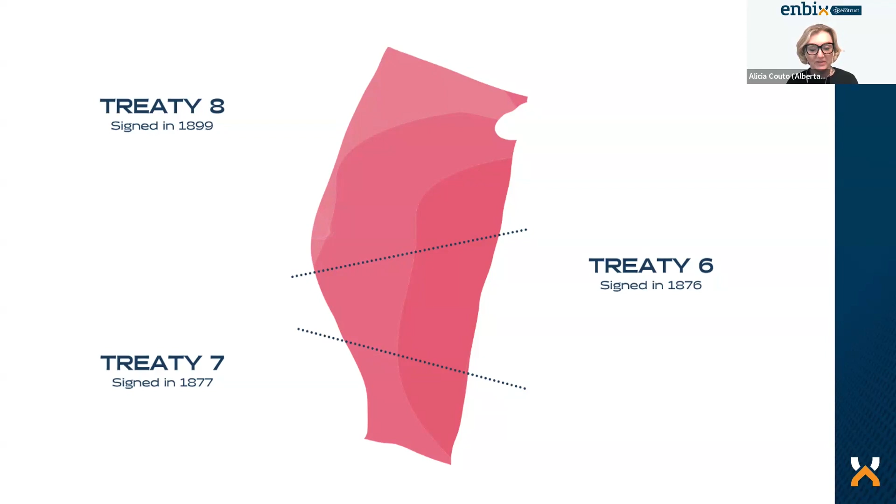For those who may not know us, Alberta Eco Trust Foundation is a charity that leads and supports environmental and climate action projects in Alberta. We were founded over 30 years ago by environmental not-for-profits and the oil and gas industry. We've partnered with often unlikely groups to help mobilize environmental action, and our programs include grants. As an LC3 founding member, we also have an endowment that allows impact investing. We help run programs where there is a gap in the industry, such as our HUP program, ENBIX, and Retrofit Accelerator, and we're well known for our strategic engagement.

Alberta Eco Trust has two programs that support the building industry: ENBIX, which stands for Emissions Neutral Buildings Information Exchange, and Alberta Eco Trust Retrofit Accelerator. ENBIX is a collaborative initiative of Alberta Eco Trust that brings the building industry together to share knowledge, build capacity, and support building and renovation practices across Alberta. The goal of ENBIX is to reduce emissions from new and existing buildings across Alberta. We do this by hosting events, sharing resources, and developing and strengthening the skills of people and organizations through training, peer-to-peer learning, and communities of practice.

Our Retrofit Accelerator is a free coaching program designed to guide building owners and managers through sustainable building upgrades known as deep retrofits. These take a whole building approach to standard upgrades to reduce emissions, energy consumption, and operating costs.

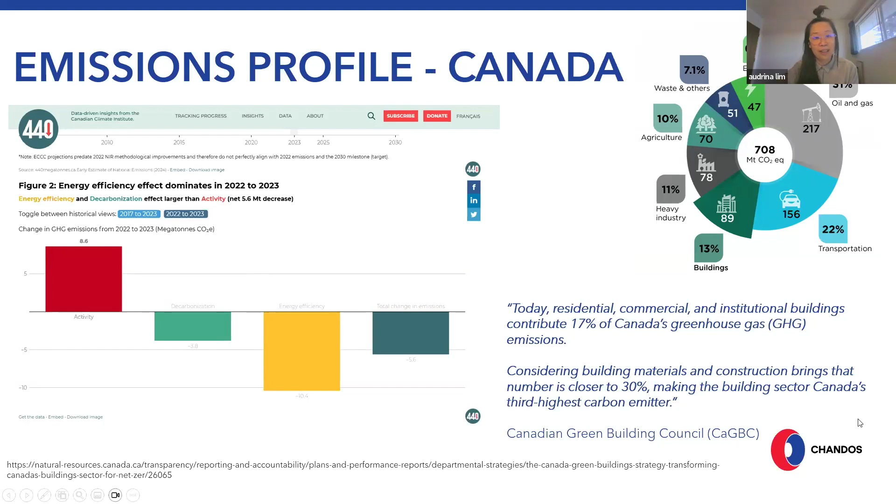And in Canada, this is actually written into our statutory requirements. So until that changes, we are all in. And even if it does change, I'm sure we are all in.

Now, these are in low-lying areas and areas that have been impacted by floods, sea level rising, fires. We've seen a lot of that in the news, and especially in Australia, where I was raised and started my initial career. They've had some significant fires as well. And in Canada, we see significant steps towards trying to understand what that looks like. We've had atmospheric rivers. They've claimed lives. We've had fires which have claimed lives, livelihoods, and houses.

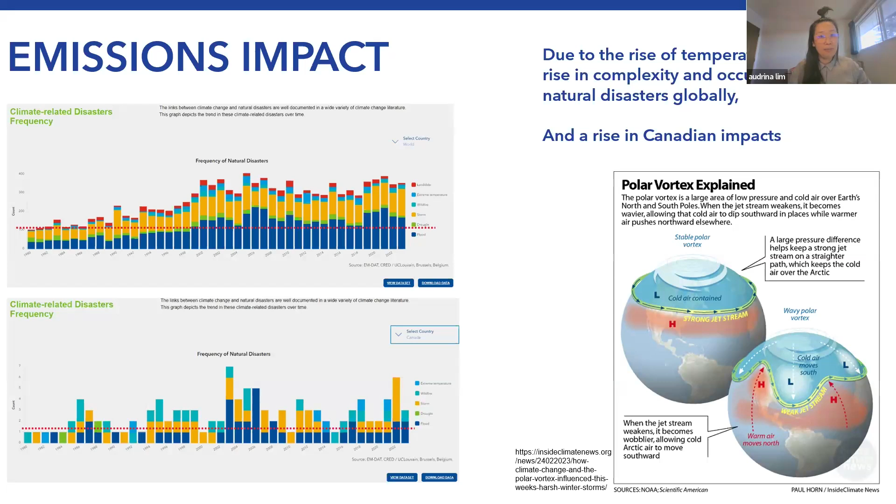A little bit about our organization and our decarbonization journey. I just wanted to show you a couple of awesome studies here. You can take a screenshot and dive into it later if you want to. But I just wanted to go through why we're doing this. We are B Corp certified, and it's part of our mandate to actually reduce our emissions. We get audited on that too.

And then with our GHG inventory, what it represents, how we measure, and what that dictates in terms of our actions on site. I want to quickly touch on our market for change and basically wrap that up in our journey to decarbonization. So with our B Corp status, we are actually doing pretty amazing. We recently scored 158 with the B Corp, and on average, companies who achieve this assessment currently sit at 50.

So for us, it measures our ethics, governance, workers, community, environment, and our customers. It gives us a general health profile of our organization, and we continue to strive for that. And one thing I'm really proud of is that it elevates our standards. It ensures that we pay above living wage, and ensures we look after every action on site that has impact, and we are accountable for it too. So to me, it's like our North Star, our guiding light, and we continue to push forward because of it.

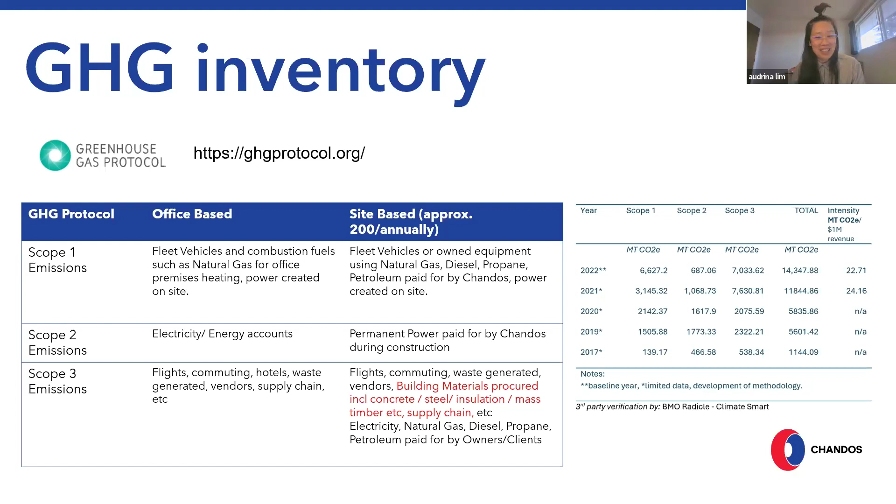And it's not easy, because Manny, who's on our team, helps me do these inventories. And between us, we go through about 500 summarized lines of data, 30,000 lines of data processing, and that's just on scope 1 and 2. And we also look at about 200 to 300 sites that have been registered on our revenue reports. So this is not an easy thing, and this is something that we have to do annually.

So with the complexity of that, I wanted to demonstrate that this isn't an easy task, but it's doable, because there's 2 people on our team who do this, and we record everything that comes across our sites that's held under our account. And this is how we measure and how we learn.

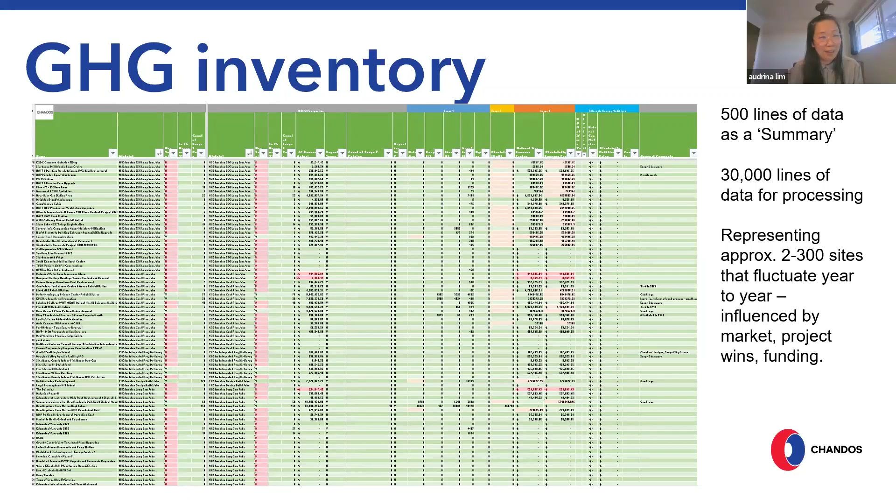We also dive into our data. We do analytics where we look at where is the highest use and where is the highest energy density, and what does that look like in terms of our emissions profile. So across our 9 districts, we take deeper dives into it, and we start to strategize how we reduce from that point on, because we want to have the biggest impact, we want to understand that it can be replicable, and we want to understand regionality.

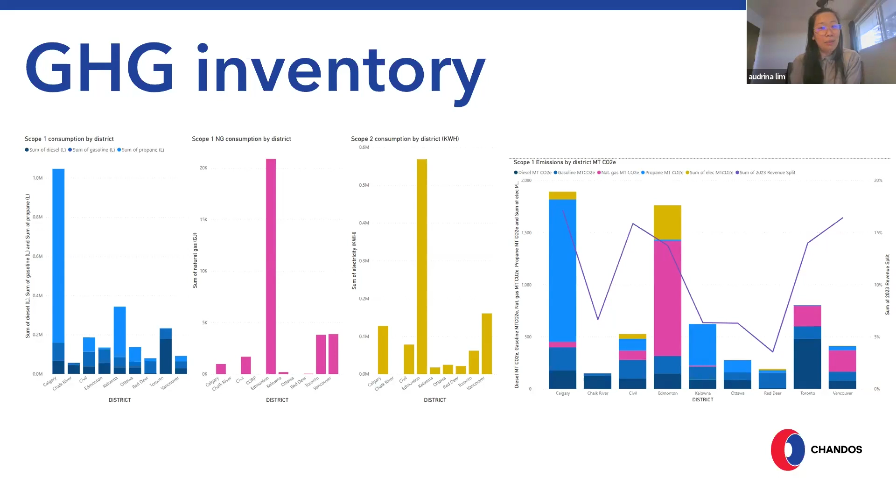In terms of action in our industry, there is so much happening. We know that there's new structures of reporting requirements coming down from investments, so it prevents greenwashing. We know that there's an update in building codes, including our National Energy Code, that helps us move the operational carbon of buildings forward. Right now, it won't be until 2030 where they start to introduce embodied carbon in materials, and that's really going to start affecting our procurement. So for all the manufacturers out there, bear this in mind, that it is coming.

Vancouver has already launched that into their regulations. Toronto, all their owned buildings also look for embodied carbon. We have financial incentives currently being provided through government and other funding sources. And for us as a general contractor, we look at our procurement, our strategy, and our construction collaboration to be able to find ways to reduce. And that's what we are going to dive into.

Now, considering we just scrapped our consumer carbon tax, we've got to understand what that does for signaling to our market. And we need everybody to still continue to advocate for this continuance of impact, because we are making a difference. I just wanted to highlight that because if we don't take further action, it's going to be a very different looking scale.

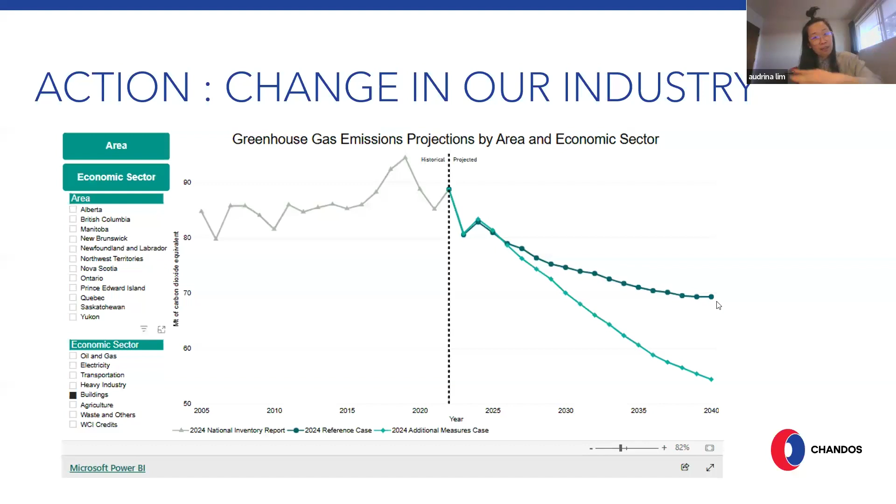Okay, moving on. So this is our team. They did an amazing job on this project, and I'll go through a little bit more.

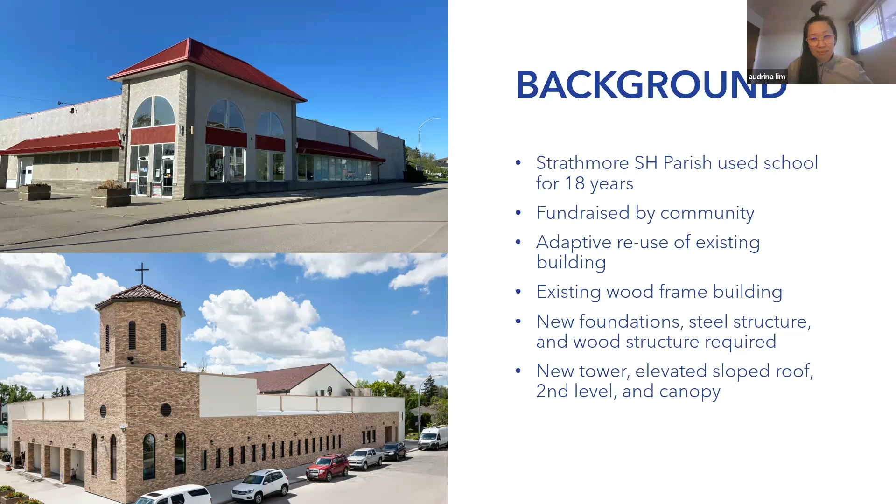Sorry, I'll just introduce myself from the previous slide. I'm Johnny, the assistant super. And yeah, as Audrina was saying, we had this existing drab building and it was very complex in the way it was framed inside. So we had the challenge of incorporating the new design into this existing, and the design was left intentionally vague so that we had an opportunity to maximize how much we reused and how much we had to take out. So that was the initial complexity, I would say, Audrina. It's just the intricacies of how it was built originally and how we were going to move that into the new design. But I can chat more on that later as we go.

Awesome. So the next one is to talk about the do less or use less. When we talk about trying to avoid carbon and the biggest impacts, I got this little graphic here from Lloyd Alter, who has this really great blog called Carbon Upfront. And there's a link there if anyone's interested. But it's about using less material. Now, it's not always okay to just do nothing, right? We have a growing population. We have a growing community. They need more infrastructure. And we're seeing that all over the globe. So build nothing is not necessarily the answer, but adaptive reuse can absolutely be a great solution.

Then we go to something like build less. How do we still have a viable construction economy if we're building less? And I think it's about building smarter, which is the next step. Then we want to look at building efficiently and minimizing the waste. Now, all of this goes into use less stuff. Then we go into the low carbon materials. Then at last, if we cannot avoid these, then we offset to get to net zero carbon. Now, this is very consistent. I'm sure you've seen a lot of these pyramids go around.

But what I wanted to highlight was from this project, we couldn't not do it. We couldn't do a reduced scope of this. So what we had to do was relook at value engineering and look at a different way of delivering this so that we still maintain time, quality, and cost. So there was a very tight schedule on this project that still had to be met. And I believe that the discussion at procurement of Chandos onto this project was that we could try and innovate the schedule. And that was a huge driver.

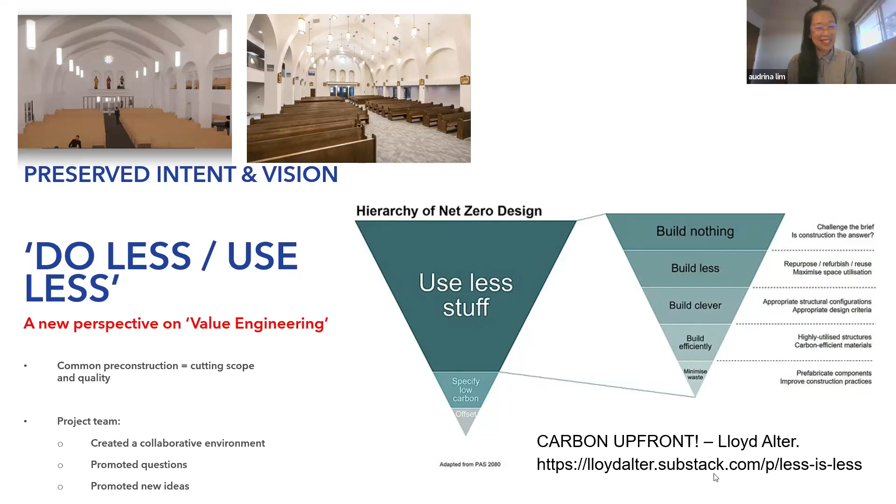So really, I just wanted to highlight the focus of the value engineering was in the foundations. As Jonathan mentioned earlier, we had to preserve the existing frame. That kind of renovation work is always going to be tricky, especially existing buildings. You have to make sure that everything's being accounted for before you start digging. They targeted the foundations because there was an opportunity to reduce the work. From having an open pit for a deep foundation, they moved towards a screw pile solution and a shallower foundation. Everything had an existing slab.

They wanted to revise this, so the engineers participated with the sub-trades and Chandos and the owner, started looking at all the potential impacts, and the outcomes became minimizing the invasive demolition, reduced cost of new foundation, including the materials and the labor, reducing the waste. If you touch less, you don't have as much to haul off site, especially with a regional location, and an increased site efficiency. I'm going to dive into that a little bit more.

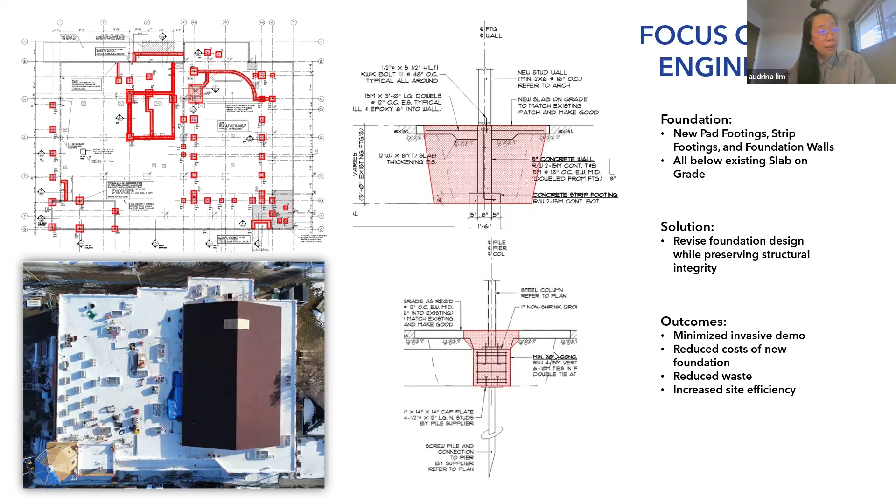So the original areas as designed, you could see what that turned the site into. With a reduced schedule, that was going to be tough because safety is a concern and you have to navigate these open cut pits. Obviously, it took a lot of real estate when you had to stockpile your soils. Any thoughts, guys? Did you want to jump into this and maybe point out some of the challenges?

Are you good? Oh, yeah. Go ahead. Johnny, I'll let you talk on that. Is he lagging? He's probably lagging. Yeah, it was just the real estate, like you said. Oh, there he is. So when I joined the project, I came in. Can you hear me now? Yeah, when I came, it pretty much looked like this. Are you getting some audio difficulties? Oh no. Okay, that's all right.

John, are you back? No. Okay. Can you hear me now? No, I think it's quite laggy. I'm so sorry. Let me try sign out and sign back in. Okay, we'll press on in the interest of time. We can come back to this.

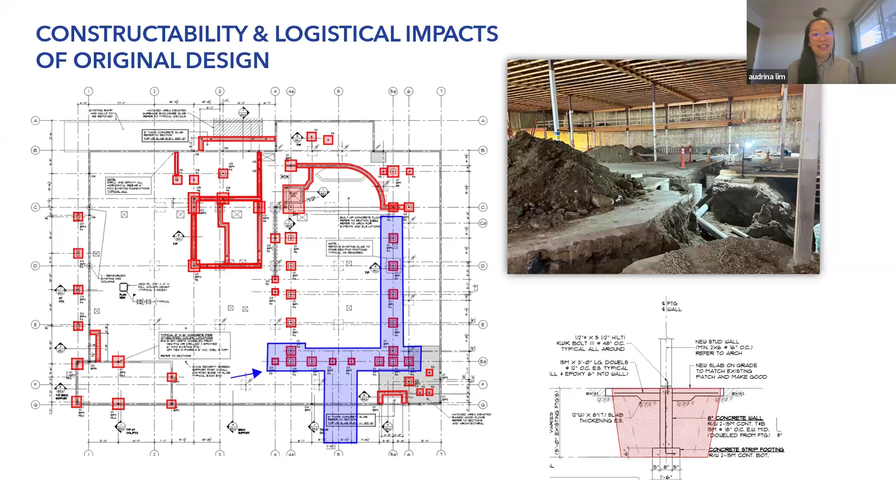So you can see there were going to be some issues, and it wasn't going to be viable to meet a very tight schedule. So the alternative was to look at what was actually going to be planned. If we were to do business as usual, this much slab would have been required to achieve this new addition on the southwest corner. And the original concrete footings would have had to be dug out and redone. So you can see what was going to be required.

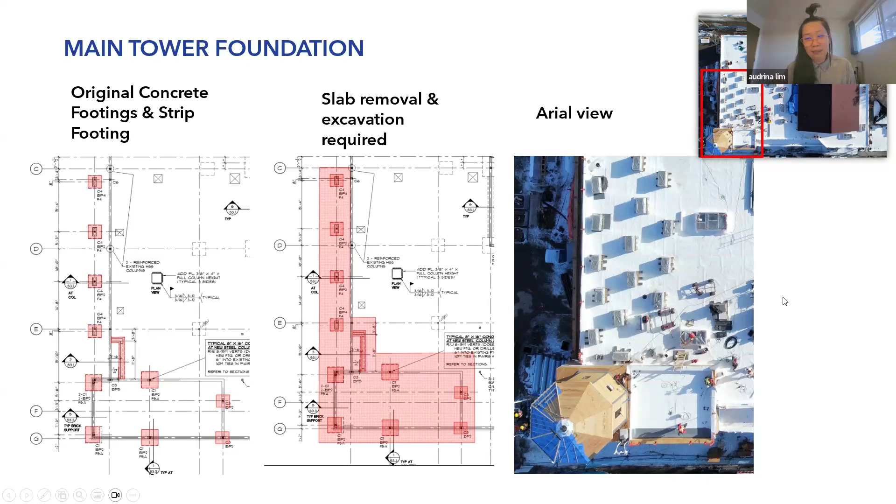The results: for the main tower and canopy foundation, we reduced the cutting of that whole existing slab, reduced the concrete removal, reduced the excavation, reduced site restrictions. They would have had to shut down a portion to create a safe environment. They'd have to do slope backs. You would have had a lot of additional storage of the excavated material, as you saw in the earlier image. What they ended up doing was going from all of this work to just touching these points with the new design with the screw piles. So you can see the significant scale of reduction of work.

And there are additional benefits to that as well: less disruptive, less noise to the rural environment. Every little bit of noise you can hear from miles away because it's a prairie. And there were also a lot more emissions reduced from not having an excavator digging around there as well.

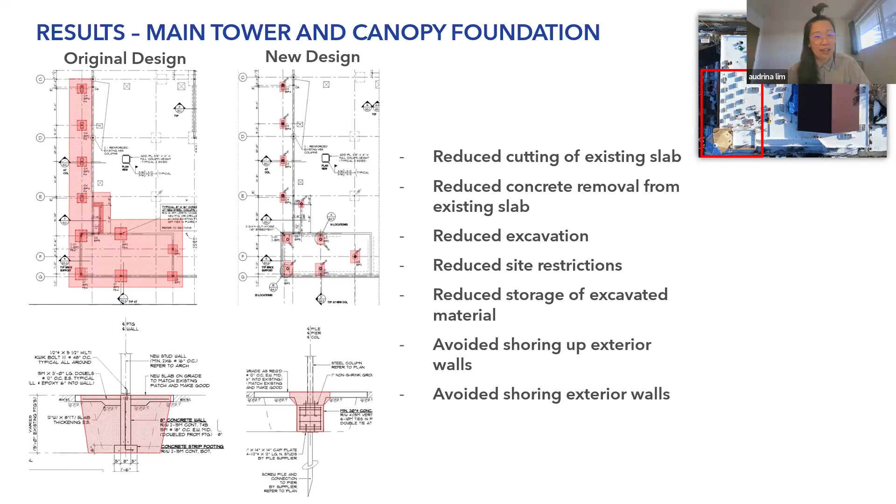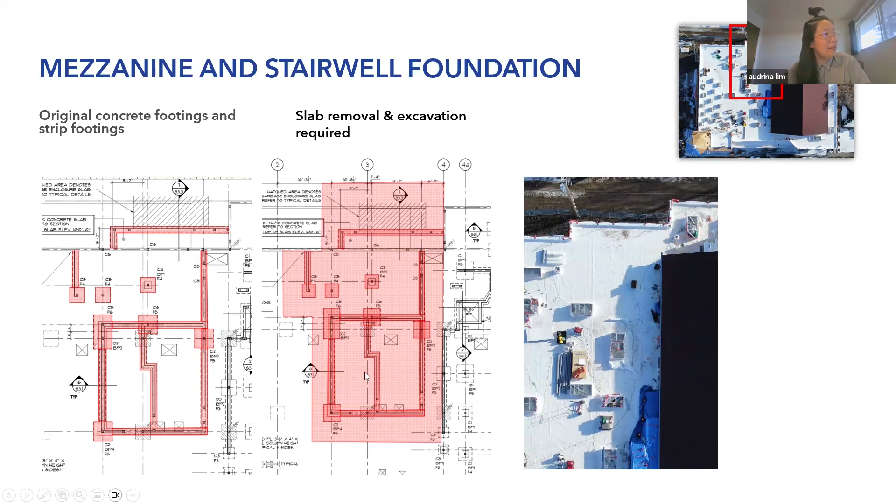So in the mezzanine and stairwell environment, which you can see in the top right, on the north side, instead of having to remove this amount of slab and do the deep foundations, as you saw earlier, the result was very, very minor. So they ended up reducing the cutting of that entire slab, reducing the deep excavation, reducing the site restrictions again, because that one backed onto a laneway and had a power pole there as well that we would have had to deal with, which was not cheap. So that was all avoided.

And it's not always easy to measure what you didn't do. So we'll get into that later. But we avoided having to shore up the power pole, shoring up the existing foundation wall, and excavating that whole back alley. So that's a significant cost that was almost unintended, and we managed to avoid that by doing this alternative solution.

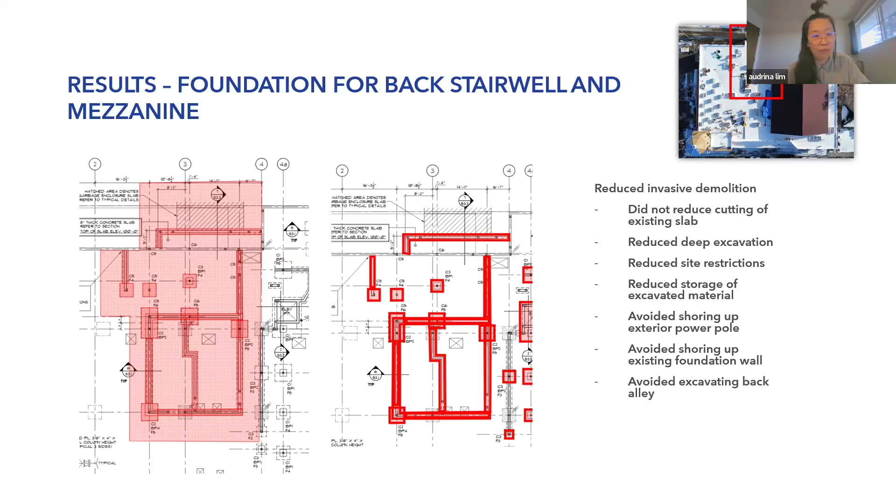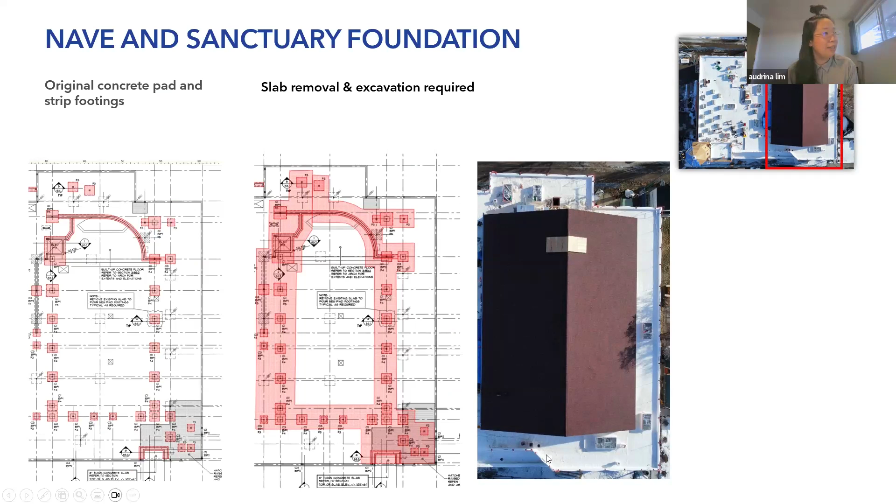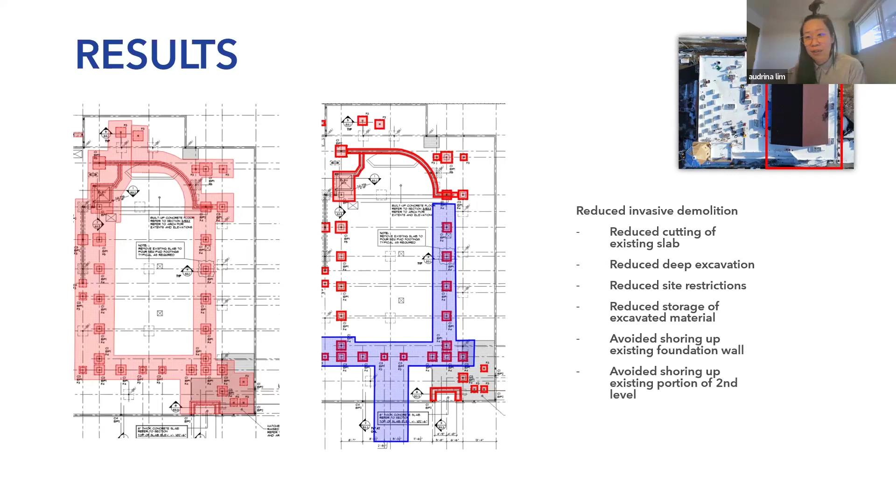In the nave and sanctuary, there was going to be a pop-up roof, as you can see here. This is extensive. So you can see how much was saved in this environment by going to the alternative solution. Very similar results, except the blue area was where that original image you saw had to be excavated. So we got some really great accurate results out of this one. And in addition to that, you can see the physical difference on the site, going from what you saw on the top to having just minor holes covered up, preserving that existing slab and making a much safer environment.

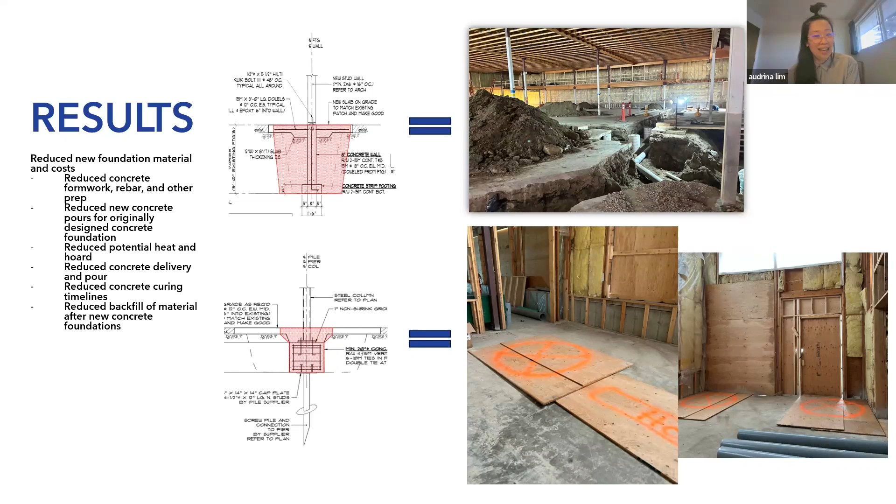This allowed for a lot of reduced material, including concrete, rebar, all the associated. The potential heating and hoarding, because this was getting close to the fall. And they actually were able to fast track this because of the reduced amount of scope. They reduced the backfill material as well that would have been required, and a lot of the concrete curing times, which allowed the schedule to improve.

So because of the schedule getting reduced, and I'll ask Jonathan and Tavia a few questions around this as well, they managed to actually save 2 months, which allowed them to beat that deep winter freeze. It was -40 that hit a couple of weeks after, which saved quite a lot on the heating costs. And it allowed them to deliver a lot earlier. I think it saved about $250,000 overall for the project in what we had measured against. So Jonathan, did you want to quickly give some insight into how this was attained?

Yeah, I've turned my camera off. Maybe that was causing some issues. Can you hear me now? Yeah, perfect. Okay, excellent.

Yeah, so as Audrina was mentioning, the original plan for these foundations was quite vast. It actually included 9 feet foundations. So Chandos kind of challenged the design there a little bit, and we proposed a solution that we were comfortable with, that we knew would work based on industry standards and the National Building Code. And then that really opened the conversation with the designer and started to build that collaboration and trust that went both ways. I think they understood pretty soon into the project that we were about finishing on schedule, building a quality product, and getting those parishioners into the space on budget and on schedule as we promised.

And just a quick note on that: in the initial meeting with the client, when we told them the schedule, they actually laughed at us because they thought it was not achievable. Fast forward to a year later, we were on the promised date, and we were all very proud that they mentioned in their opening service at the church that on May 31st, as promised, we moved in, and that was a great achievement all around.

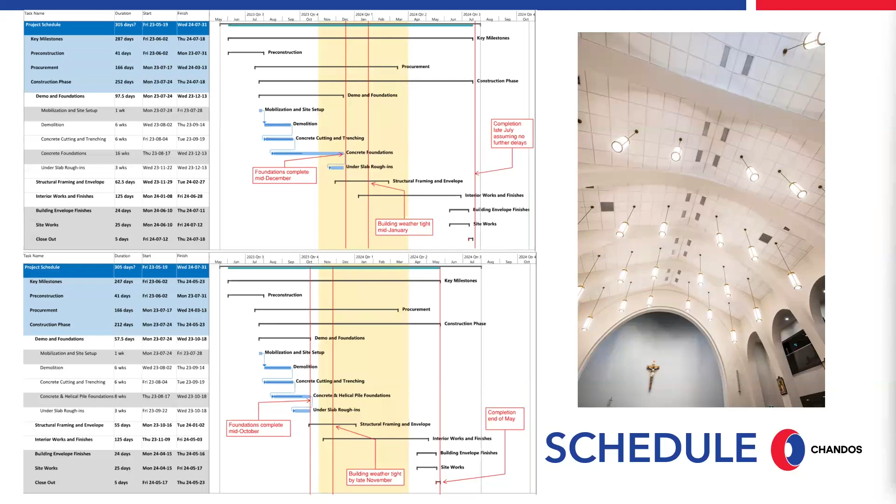So back to the schedule. With this proposed solution of doing the screw piles, like Audrina mentioned, we were able to tighten everything up and stage ourselves for the winter effort where we could be inside with minimal critical heating, so that we could keep going through the deepest, darkest winter, which is exactly what we did there. I'll let you carry on, Audrina. Sure, we can jump back into that later. Yeah, for sure.

Okay, so I'm going to blitz through a little bit because we're getting a bit short on time. But in the cost savings, we saved $250,000 in the foundation alone. And that doesn't even include all of the additional overhead savings that we didn't have to go additional to, right? So this is significant. And this also does not include our heating and hoarding savings because they were going to be contractually separate costs. So there was a lot more that was coming that we actually managed to avoid.

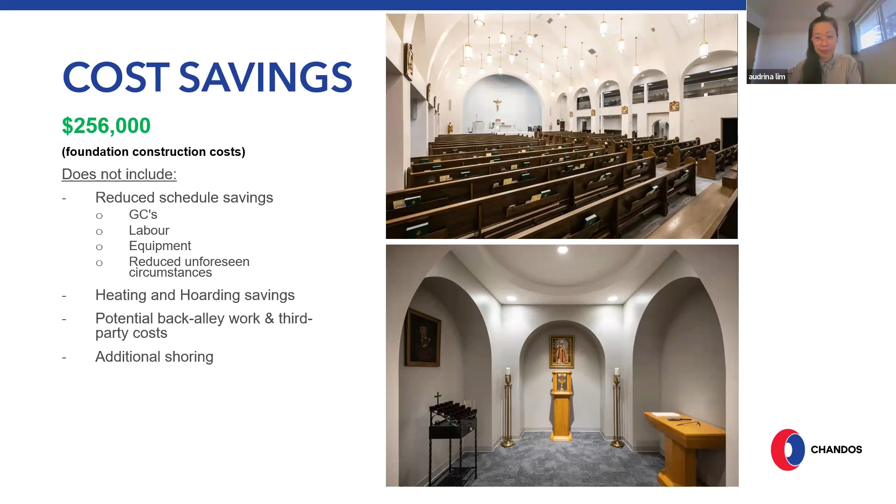But when we try and measure avoided things, we try and look at what is it that's tangible for us to measure? And I'll get into that a little bit more. There's some other wins. They were able to tie into the building utilities to reduce the overhead costs of fuels on site. There were a lot more clean sites and fewer safety issues. We had much better constructability. So because of a cleaner floor area, they were able to work overhead and enclose the roof quicker. And that was a self-performed scope.

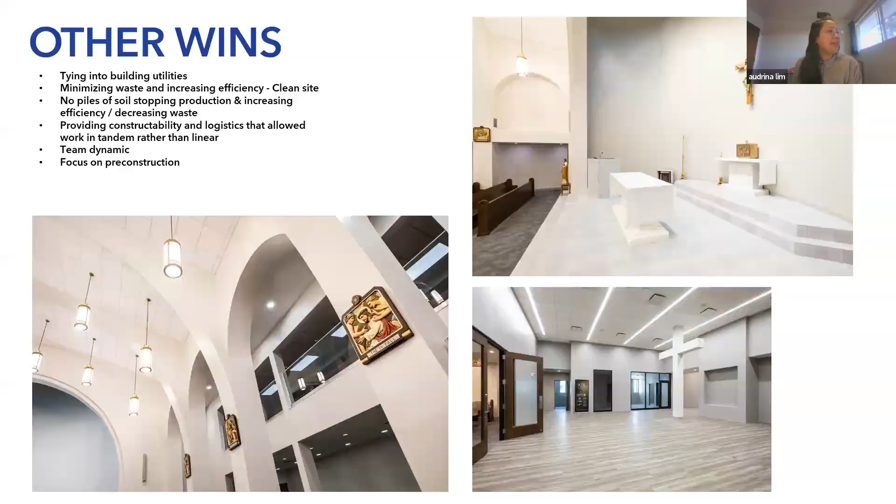And the team adapted really well to that and were able to then create a much warmer environment, also providing more efficiency for heating when it actually came down to those freeze conditions. And again, the team dynamic, the focus on the pre-construction planning, measure twice, cut once, that is the motto of this amazing team. And they've been continually delivering that on other projects as well. Some more images from the finished product. Very good. Looks beautiful.

Okay, I'm going to dive into measuring avoided emissions. So how do you measure something that didn't happen? You've got to create the opportunity to ask the questions and collaborate. Create a business as usual baseline. So what that means is, what would it be if I was just to do this the usual way? If I just did standard practice, cost it out, get your schedule, and look at the activities that you're going to have to do, how much material you're going to require. Then you can start to challenge yourself to think differently.

So then another way to consider measurement is to set out what is tangible to measure. Because we want to make sure that we're not overestimating, we're going to ensure that we have some measurability. So we want to be conservative in outlining what we can identify, and that we can support it with data. So that allows you to then set a baseline and measure different conditions to the same data set. And that way you have really consistent differentials that you can identify and dive into your analytics. Then you can evaluate. So you set a beginning and end date, be specific with the activity or the activities that you're going to study. And we're going to dive into it.

So material reductions. What we did was we did a takeoff of the materials. So I looked at the total cubic meters on the before and the after through concrete pour logs. We measured the types of materials that were actually required. And then we also remembered to add the emissions required for the steel screw piling, right? So in terms of materials itself, by not having to replace some of that existing slab, we saved 53 cubic meters. And then by diving into an environmental product declaration for industry average, we actually applied the GWP savings, which is global warming potential. So this is the amount of embodied carbon, upfront carbon, and if you do a multiplier of 53 cubes of concrete, it ended up at 19.1.

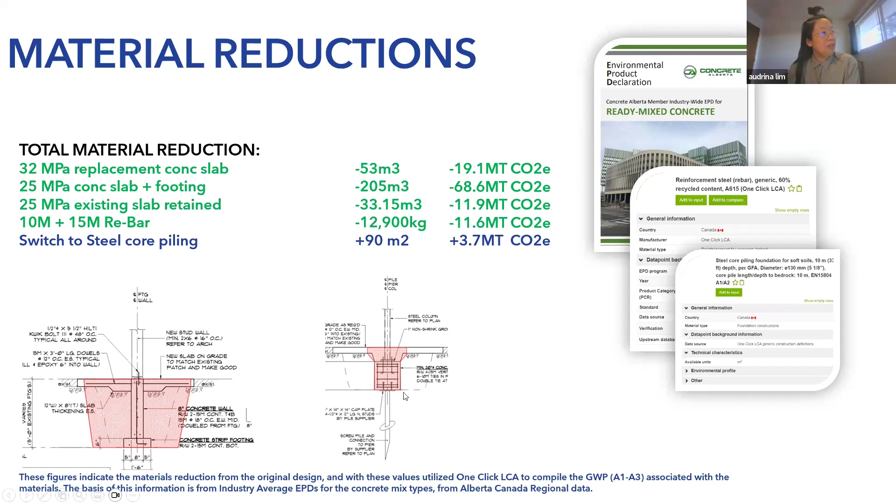And then we just went through and looked at all the items that we didn't have to purchase, and we actually saved quite a lot. So from there, in just doing that swap, we were able to save 107 metric tons of carbon emissions. And I always like to give an equivalent: it's the same as growing almost 1,800 tree seedlings for 10 years. That's how much carbon you would have had to replace it with, right?

So the tools that I utilized, I made a simple spreadsheet. You can see anyone can do this. If you have access to One Click LCA, EC3, or Tally, you can also do this too. But you can compare your baseline to your redesign or to your alternative, and you can start to quantify the units of measure, make sure they align with your EPD, outline the quantity of material, and the CO2e, which I use metric tons of CO2e. And so when you factor that in and do your multiplier from your baseline to your redesign, you get to see your avoided emissions.

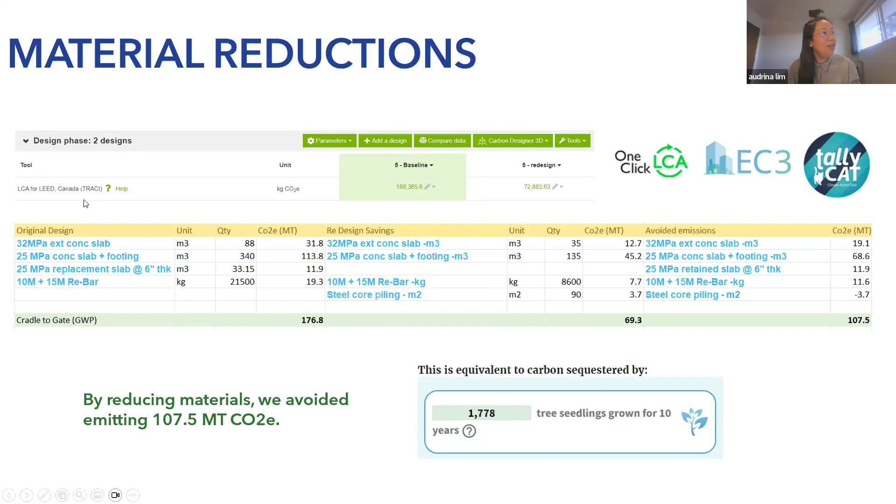So this is a really simple exercise I like to run. And you can actually see from the cradle to gate emissions, so your GWP, just up until that point, we were able to save 107 metric tons. So just in materials alone, we can have huge gains.

In our activity reductions, this is even harder to measure. Now, for me, I wanted to make sure it was tangible. So I couldn't measure everything. I just measured some. In our activity reductions, the one thing that I could tangibly measure was the hauling of the concrete waste we would have had to take to the recycling facility. Now, I did a quick map on Google Maps on where the closest concrete aggregate recycling facility was to the site, and I could get the mileage between there.

So you look at the distance your shipment will travel, the weight of your shipment, because it does have an impact on efficiency. And so for us, that would have been 10,000 kilos or 10 tons. And the emissions factor. So I went through the Green Freight Handbook, which has an emissions factor of all the trucks that they utilize to haul. And we just did a simple calculation for the distance, 22.3 miles. There would have been about 20 hauls of this based on the volume and weight of the concrete, by the heavy vehicle emissions factor, which would have been 2 kilos of CO2e per mile. So because it's American, I had to do the conversions to metric, and then we were able to uncover that was 8.92 metric tons of avoided emissions.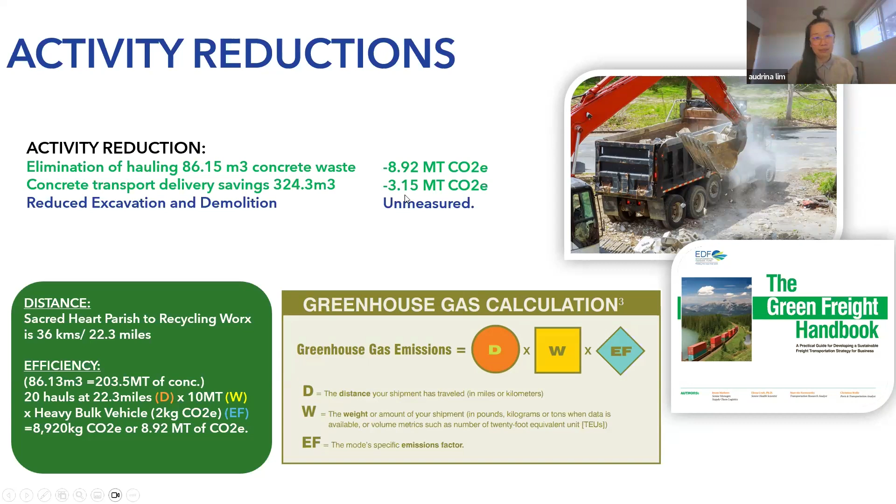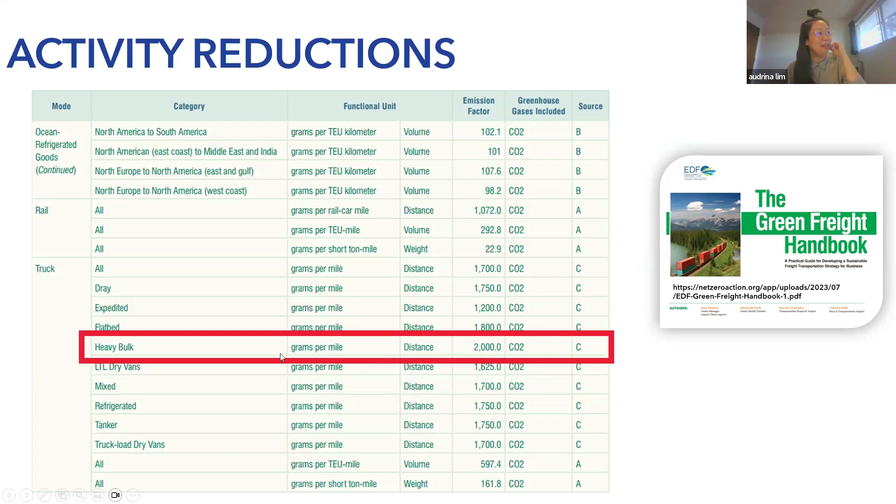And then in the additional concrete that would have had to be delivered to site, we could also measure it from our concrete supplier to the site and look at how much we would have saved as well. And in the same fashion, we saved an additional 3 metric tons. So here's a quick snapshot of how I found the heavy bulk emissions factor. And you could have that as grams per mile. So then you have to do your conversion calculations and apply that emissions factor, and you'll be able to do your calculation.

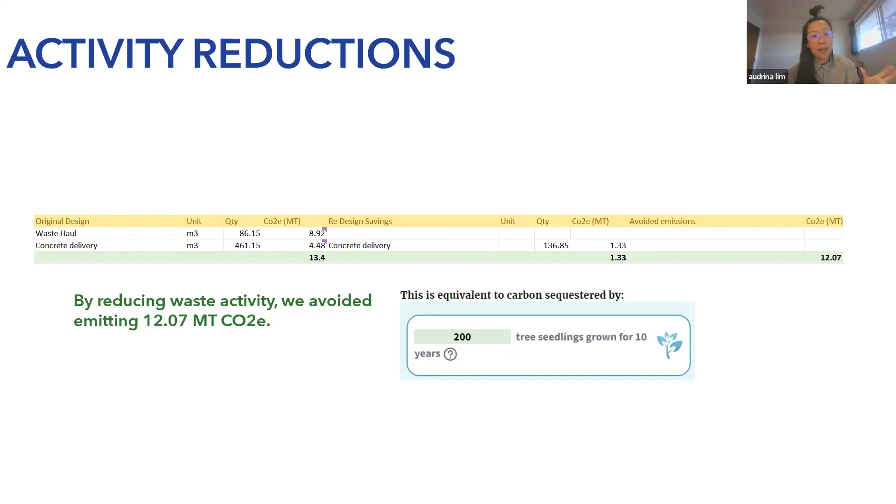So again, I used a very simple spreadsheet and looked at my emissions factors and was able to ascertain that was 12 metric tons of emissions saved just by avoiding those 2 activities. Now, I couldn't avoid all the other activities, but I could identify these ones specifically.

Schedule reductions. Now, how on earth do you account for total schedule reduction of what activities you didn't do? Again, I had to quantify. So I looked at the heating and hoarding itself. Because we were able to shorten the schedule, we were able to save on the heating and hoarding prior to that deep freeze that we had in the end of 2023. It went to -40 for those who may not remember, it went to an absurd amount of cold, and we actually had to have the shutdown on a lot of our power sources so that we could conserve energy. Now, on this one, we looked at the 2 months of savings on the construction schedule, and it enabled the majority to be pushed forward for the construction work. And we didn't have to do this heating and hoarding.

So for me to be conservative, I measured one of the heaters we would have had to use. So a 399,000 BTU propane heater. And I found the fuel consumption rate from the manufacturer's catalog. It was 16.5 liters per hour. I looked at how long it would have had to run. And if we had extended this by 6 weeks, I calculated the number of hours, which would have been like 24 hours a day for 1,008 hours for that week. And I wanted to look at what that meant in terms of our emission savings. So I had to add that over here. So we wouldn't have had it full time, but, oh, sorry, my bad. I'm going back. We avoided 5 weeks of heating because we didn't have to do that heating and hoarding because we moved it forward so quickly.

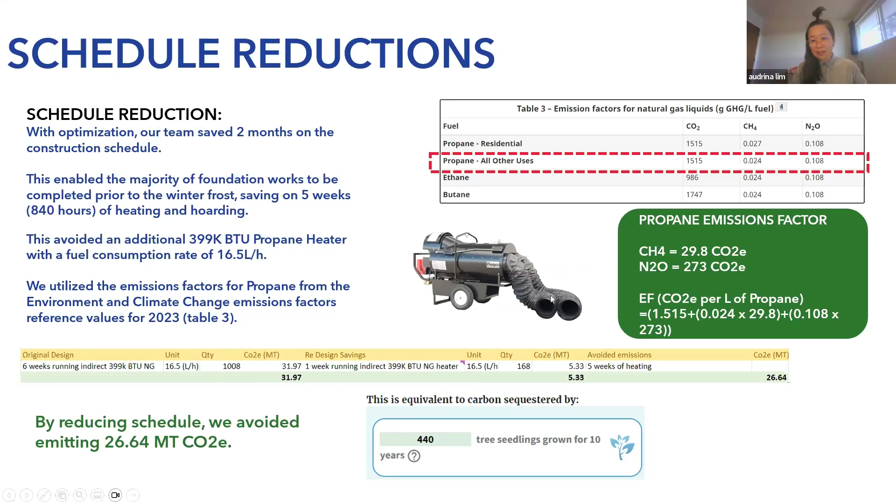I know that was a bit complicated, but what do we do with all this information? There's so much data here. How do I digest this? So by creating a scale of impact, by understanding the potential impacts each of these things have and educating ourselves and getting a literacy around it, we're able to use this to start predicting what we can save in our next project. So then we can start to measure again, improve our literacy, our data, our accuracy, measure again, set our emissions budget, measure again.

And we can keep going until we really get an idea of what activities have what impact. And we can plan ahead in a much better way with much more financial accuracy and acumen. In the same light, we can do that with emissions in the future. So we're going to scale the action. We're starting to look at scaling this action across more sites. We're starting to signal to the industry through talks like this that we can actually do this together.

And imagine if everybody found that one action that they have impact on and can measure that, and we can start to say, here are some steps we can take. And this can create our decarbonization strategy. And that's what we're doing. We're creating a playbook on how to do low emissions construction and not just business as usual.